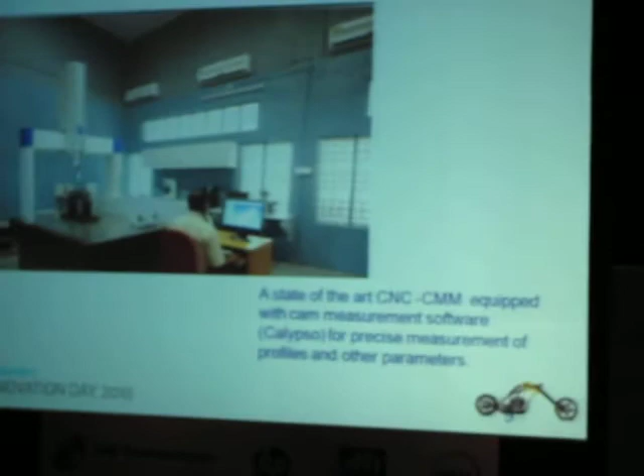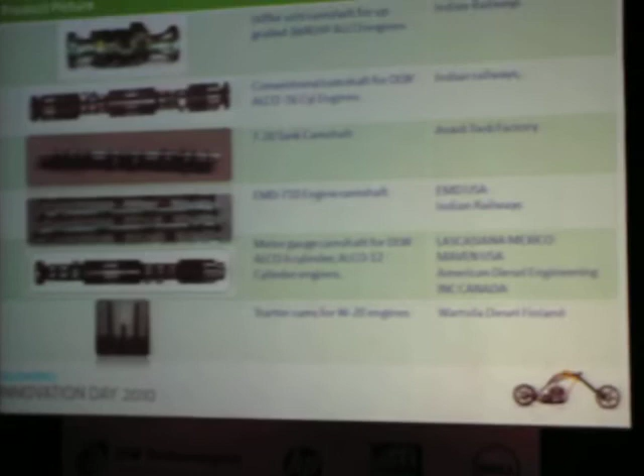We have a full-fledged inspection and metrology lab, because for camshafts, especially, the material is important. Thereafter the machining process, the precision of machining is also important. And a CNC CMM equipped machine to measure the profile. We also manufacture another very special product called high pressure pumps used in air conditioning and refrigeration. I'll touch upon that now.

Our camshafts is what you see here. These are not small shafts, these are anywhere between 1 to 1.5 meters long. And today we supply more than 60% of the Indian Railways requirement for camshafts for all the engines.

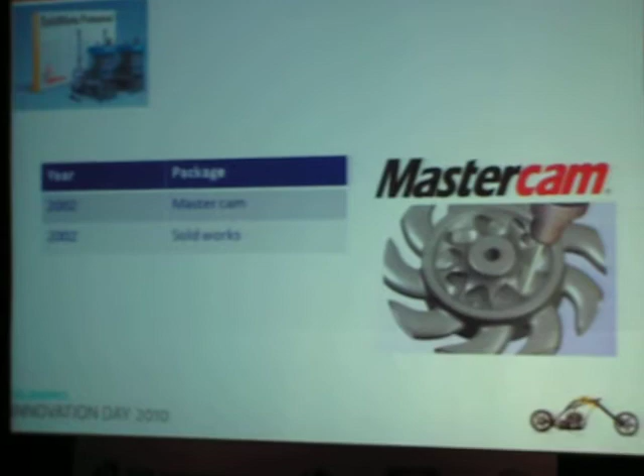So in 2002, when we had to move from the conventional manufacturing process into the CNC type of manufacturing process, that is when we had approached Syntec, and that is where we got introduced to Mastercam, because we were developing a cam grinding machine with the help of Prasad NC machines.

Why we chose this package was, one, I recall a previous speaker, Mr. Kaushik, said that using yesterday's tools for today puts your business out tomorrow. Yes, we understood that. So we looked at all these factors. These all made sense to us, but the most is the excellent service and support rendered by Syntec Technologies,

because we were for the first time entering into the CNC area, and we had absolutely no idea of how CNC machines worked. I remember when we were testing these machines, especially the cam grinding machine, a unique machine manufactured first time in the country by Prasad NC, for 10 days, day and night, Syntec engineers would be with us to try it and test it to get to accuracies of roughly about 4 to 5 microns on profile accuracy.

So, application of SolidWorks and CAM in CS: we use SolidWorks for converting customer 2D drawings into 3D drawings for better understanding of load profiles, overlaps, inaccuracies in assemblies, because these camshafts, when you assemble them, are roughly about 4 to 5 meters long, and these are used in engines which are around 6 meters in length.

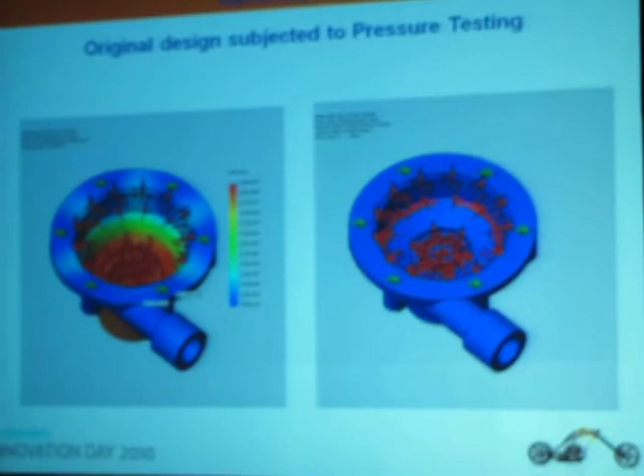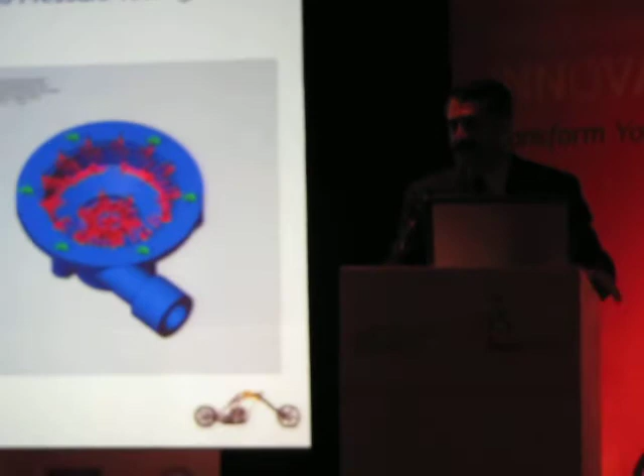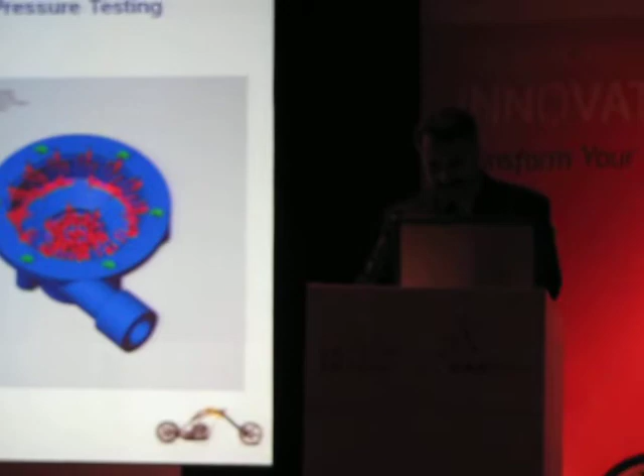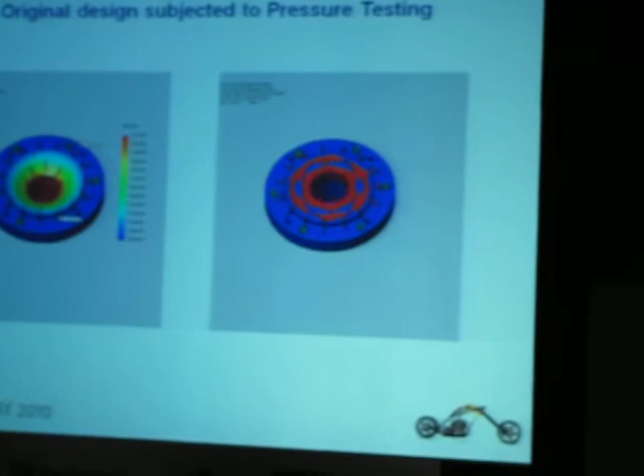So similarly, this is a rear housing on which you will find a lot of areas where it suggests that failure mode is evident. So now again, if you don't have a restriction on material, you can change your material for a much higher yield strength, or if you have a restriction on the material, then you will have to change your dimension, and this is what we did. And these pumps operate at anywhere about 1500 psi in the refrigerant circuit, and especially for carbon dioxide refrigerants, these pressures are required.

What we propose to do in the future is, in the pump manufacturing area, you have four major components. One is the type of liquid you want to pump. The second would be the type of impeller. The third would be the speed of the impeller, and finally is the volume. Today we are at designing the volumes. In order to move up, we would require to further look into the CFD module of wet pump units.

And for application in the camshaft area, we are looking at the motion module just to understand the stresses, especially as engines become efficient. You would have heard of CRDI, common rail direct injection, where you atomize your fuel and start putting a lot of pressure. So what happens is these pressures start forcing on the camshaft. So we need to understand what are the stresses on this camshaft and whether the current material can take it.

But of course there is an issue. I don't know how the motion module is going to handle a heat-treated component, because generally when you do not have a through heat-treated component, when you do a surface heat treatment, your properties change. I'm not sure how SolidWorks can handle it, but in the discussion Madhu informed that he could do something on that. And this is some work we have started with Simtech. We have given some information, and they are developing the CFD module for us. So I have just given some pictures on how we propose to go about introducing the CFD product.